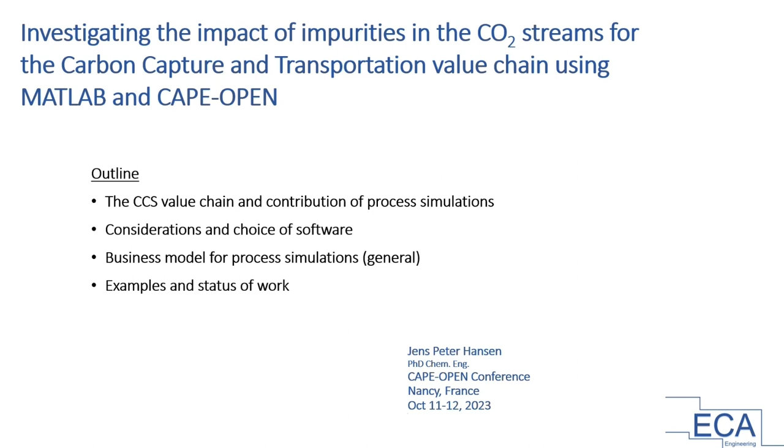I had these customers from the marine scrubber installations, many Danish ship owners, and I was contacted by Navigator Gas actually here in Denmark, and they asked me if I could help to look into the optimal ship design for CO2 transportation, liquid CO2 transportation, and they were in particular concerned about what impact impurities might have on that. And of course, they could just put a box around the ship, and they would end up saying that the cheapest, from their point of view, would be to transport the CO2 just around the triple point, about 7 bar pressure and minus 55 degrees C.

But what if we look at the whole value chain for the CO2? Would that also be optimal? Because that low temperature and pressure will require a very high purity. I'll come back to that. And that might imply some cost on all these processes.

So yeah, I've started to actually just guess some cost here, that's the red numbers. That's purely a guess in the beginning here, what it could cost in case of different purities. So yeah, we don't know in the beginning actually. So that's actually the goal of this study, to learn a little bit more about it. And I'm sure process simulations can help in answering this. And then if we get some simulations up and running, the idea is also that we can actually discuss with different emitters the type of flue gas and how we could contribute to the whole value chain.

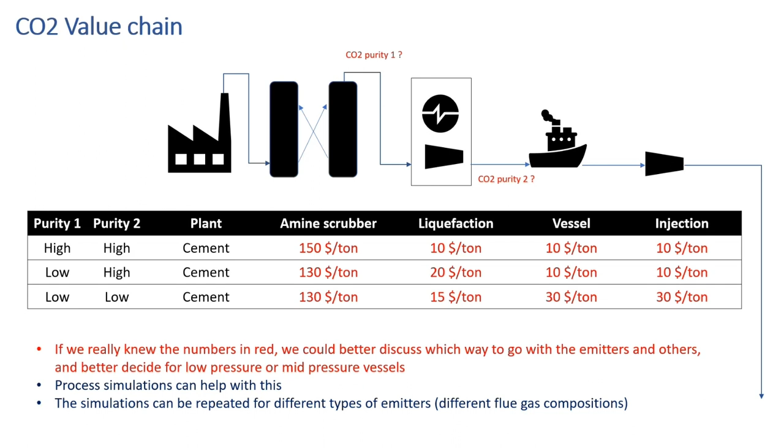So process simulations, I think, are an obvious tool for me with my background, because the emitters are not having these processes up and running yet, and they need to overcome this hen and egg situation. They don't know what their compositions are, so we need to help them with this.

Also, this CO2 transportation is strongly coupled both to the upstream and downstream processes, so we cannot just consider the transportation alone. And then I consider that actually many of these unit operations are not that complex. It's really basic from a chemical engineering point of view. So we can actually simulate many of these things. And of course, the value chain is too big. It's going to be very, very expensive to capture the CO2, and it will be too slow to just build it and try all the different options.

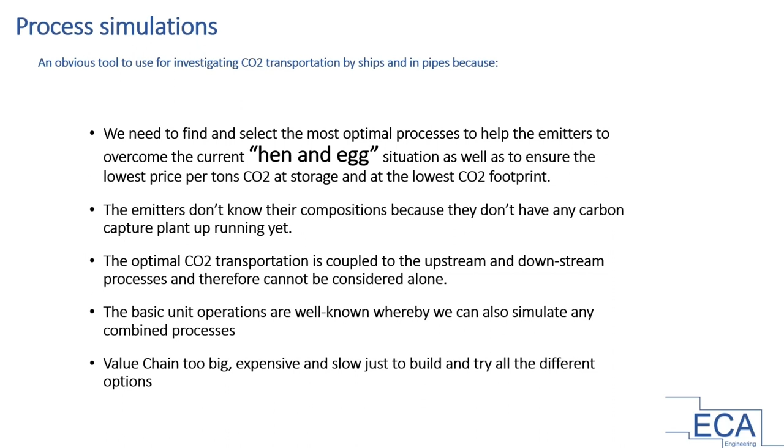So in more detail, we can say, okay, we can simulate process flue gas. I have past experience with the cement plant, so I have actually made a model for a cement plant simulation, so we can get the exact flue gas composition and heat balance for that. But that's easy to actually change to a power plant or waste incineration plant. It's just a matter of the fuel.

And then we have CO2 capture. Amine scrubbing is the most mature solution, but I'm sure that there will also come many other options in the future. But so far, I've only had time to look into amine scrubbing. And then we get a concentrated CO2 stream out of the amine scrubber, which we need to compress and cool to get liquid CO2, which we must store in a tank and load on board the ship when it arrives at a port.

And then there can be different options. The ship could sail to a hub or go directly for injection out in the North Sea or wherever it's going to sequester the CO2. But also there we need basically the same equipment, a compressor and heat exchangers for the sequestration.

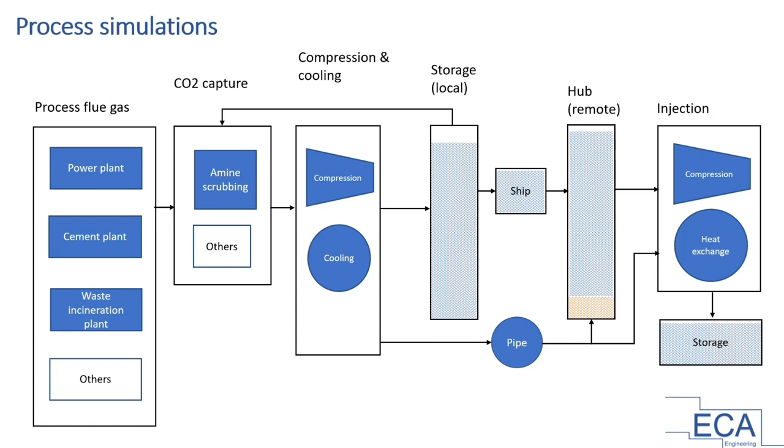So some considerations regarding the choice of simulation software here. Of course, the ideal would be to model everything from the bottom here, to have all the unit operations, all the parameters, all the thermodynamics in place. So that's really what I would like to do, but I don't have time for that. And this is

what customers usually are asking about, the return of investment for a ship or all the equipment. So we need to get to the return of investment, we need to estimate the capex and the opex, and the opex, that's the energy consumed basically, both for sailing the ship and for running all the compressors, the amine scrubber and everything.

And I think when communicating here with my customers and also in my previous positions, I found out that it has to be in the unit to communicate with managers, and that is US dollar, in this case US dollar per ton of CO2. Then you have the communication line. If I start talking kilowatt hours or kilojoule per mole or something, you lost 90% of your audience. But it's easy to convert for us. So I usually try to end up with that.

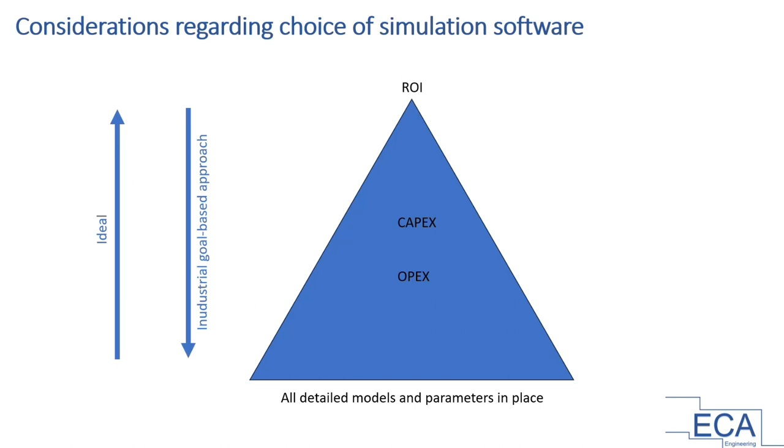So the choice of simulation software: I have experience with Excel, of course, Pascal, we learned at the university 30 years ago, Fortran also, MATLAB was also introduced at that time, C++, Aspen, we touched upon at the university, CFD I worked with. In FLSmidth, we used some HSC chemistry. It still exists, I can see. In Alfa Laval, we used partly EES, but also MATLAB. And in FLSmidth, we also used gPROMS for making dynamic simulations. So I have tried all of these types of software, more or less.

But for some reason, I've ended up with building up many functions and sub-functions during the last 25 years in MATLAB, and so that became my choice here. But unfortunately, there is no inbuilt thermodynamics or chemical unit operations in MATLAB. So that was why I contacted MATLAB or CAPE-OPEN here, and fortunately, AmsterCHEM, Jasper helped me to connect with this MATLAB CAPE-OPEN thermo socket.

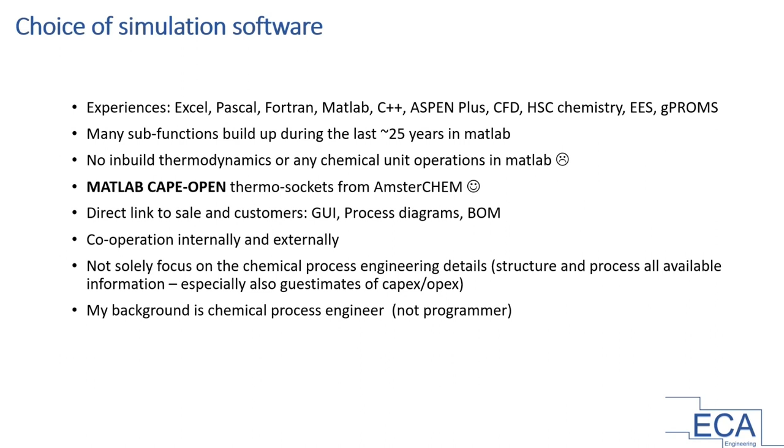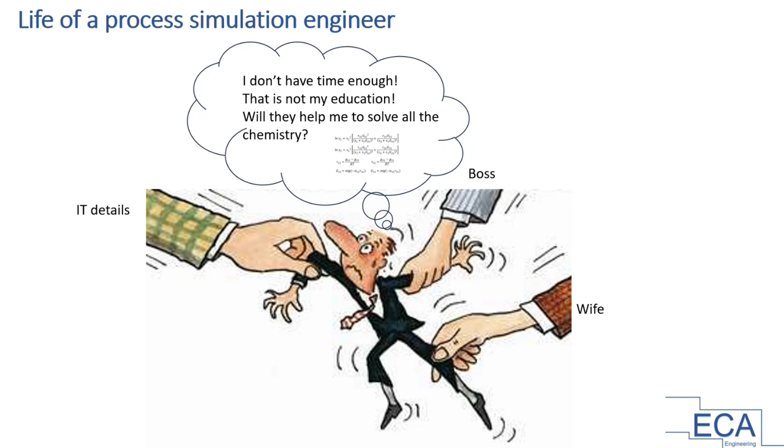Some few thoughts about the business model. I'm sure there's a huge potential in process simulations. If we, for example, look at the International Energy Agency, how much CO2 they forecast needs to be captured, and we look at these $100 per ton, it is billions of dollars every year, if this is not optimized, that are simply lost. So this is certainly an area we can help.

In Denmark, there is a lot of focus. We have something called demonstration projects, which are publicly funded. But the word is demonstration. They want to see something erected out here at our cement plant, for example. There's not so much attention, unfortunately, on what simulations can do. But when I look at what they're doing and how many millions they spend on these demonstration projects, I just consider how far we could get with simulations. We can simulate many of these things.

Yeah, I think I have mentioned this. It's also, I think sometimes when I talk with customers, a bit disturbed by buzzwords like Internet of Things, artificial intelligence, especially big data. Why can't we just use artificial intelligence and it will give us the optimal solution?

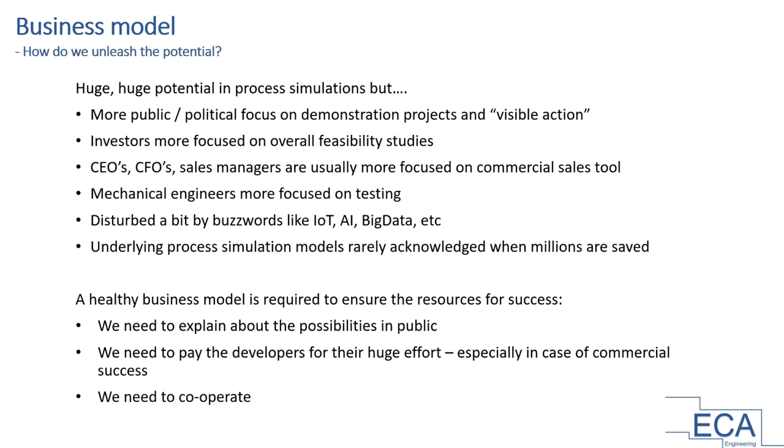So I think we need to also explain about the possibilities in public, what we can do. We need, of course, to pay all the developers for their huge effort, especially when we have success. And not least we need to cooperate. So this conference is good, but we also need to attend more commercial conferences, I think, and to bring out our message here.

And then, yeah, I will show just some examples. I used MATLAB, and I start always just to get the heat and mass balance up and running in a very simple way. And then if I have time, then I can start to dig into further details.

This is a cement plant where I know what is the approximate heat balance in practice, 760 kilocalories per kilogram of clinker. Everybody knows that. So my simulation should turn out with that number, so that we can choose different fuels for the calciner and the rotary kiln. And so this is actually fine to get the flue gas stream composition as required to continue the simulation in this case.

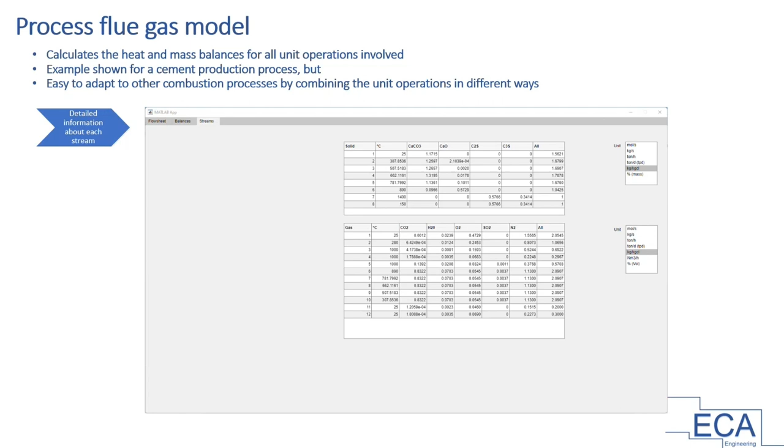Yeah, I built a sheet here to ensure that the balances are okay, mass and heat, and all the streams we can see here. Then I have made this CO2 scrubbing model, the amine scrubber, with an absorption tower and a desorption tower, and a big heat exchanger in between for the amine running around here. Again, we have the complete heat and mass balances to fit here.

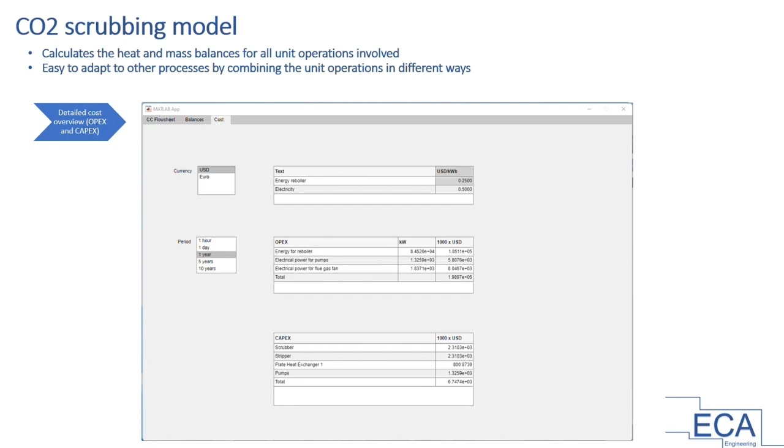And then I have also tried to add some cost for electricity, so we can estimate what are actually the OPEX for this. Then on the liquefaction model, and this is where I have integrated with the CAPE-OPEN thermo socket. First, a flow sheet, and it's easy just to increase the number of compression stages here. It will automatically generate a new flow sheet.

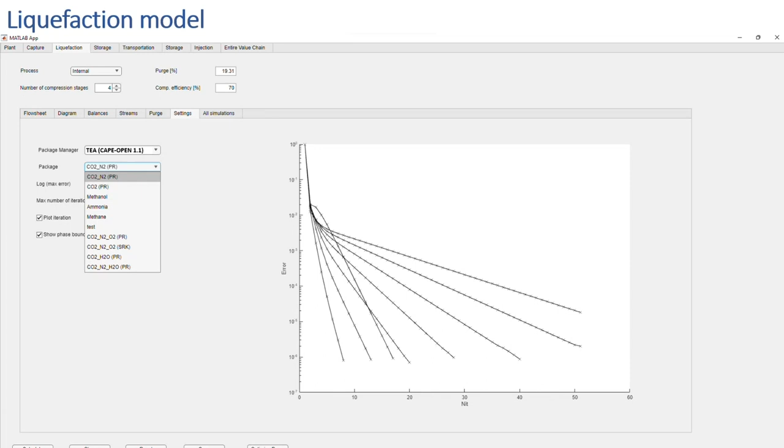Imagine you have a terminal here, for example, it could be 8.5 bar pressure in the terminal, minus 54. It has to be loaded on a ship here, but if that ship only has 6.5 bar pressure, some of this nitrogen will flash off with CO2, and then the tank on board the ship is not completely insulated, so heat will penetrate during the transportation.

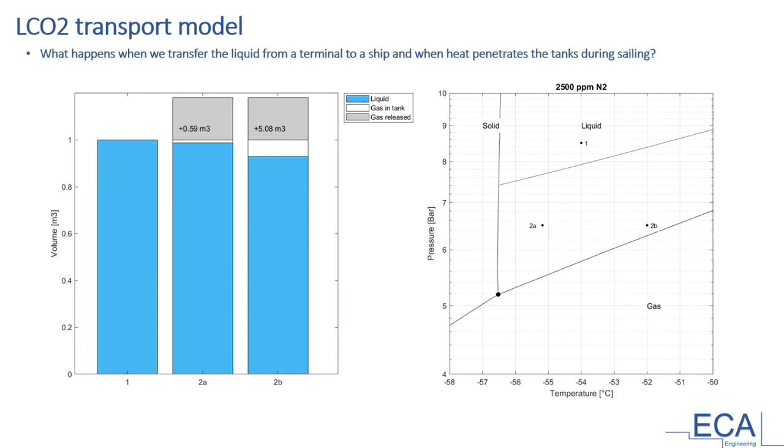So you can easily end up here, depending on the amount of impurities, with less CO2 when you get out to the field for sequestration, if there are too many impurities and if the system is not designed correctly. So it's things like that I'm using CAPE-OPEN for.

This is another quick app I have made as a web app, so it's easy to access for everybody, because there are different standards for the purity, and it's not so easy for non-chemical engineers just to convert from dry basis to wet basis, for example, and see if a certain analysis complies with these purity standards. So it's an easy way to, and you can choose different standards. Yeah.

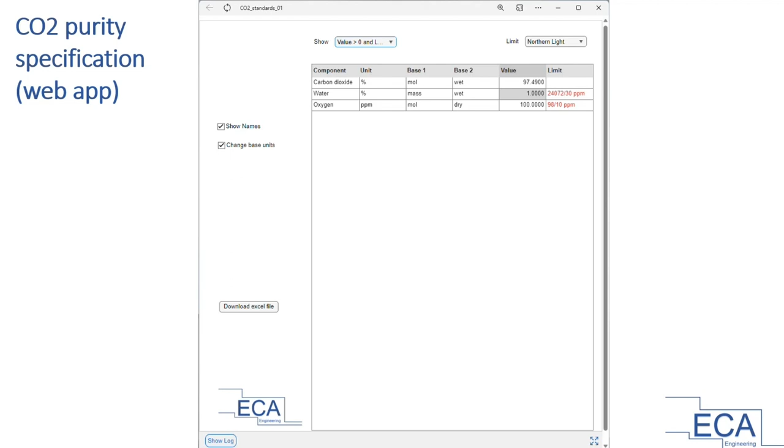So I think that's what I can present of status for today.

Thank you, Jens Peter. So